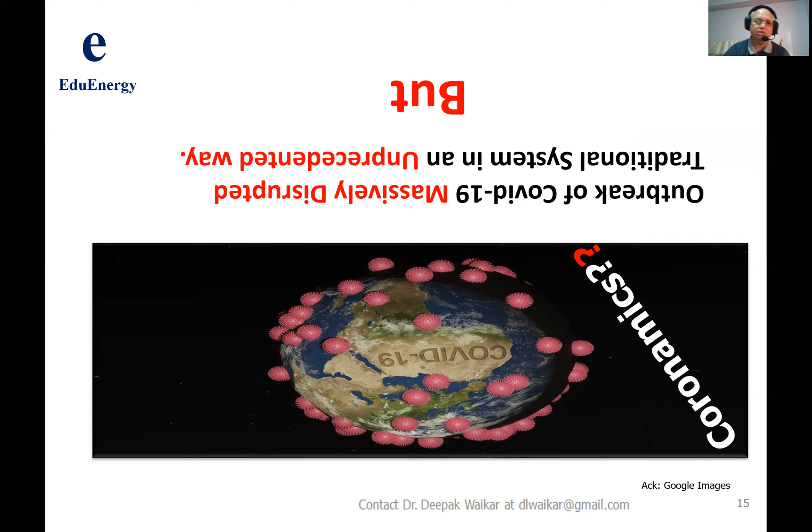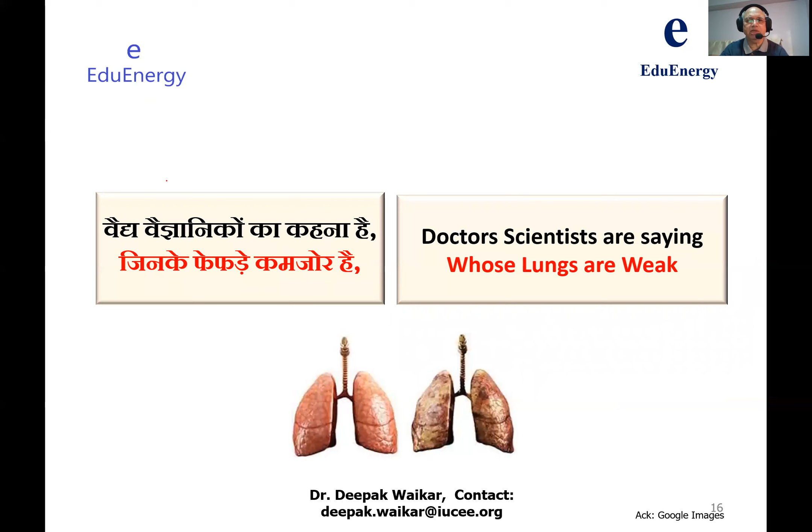So what can we do about it? Around two weeks back, and last week also, I shared with you that doctors and scientists are saying that people's lungs are weak. One reason could be medical, but another is environmental, our lifestyle - our lungs are getting affected because of this.

Hazardous air - you must be reading in newspapers and watching on TV about what is happening in New Delhi and around northern India, most of northern India. The air is unhealthy, very unhealthy, sometimes reaching hazardous zones. This was not the first time; it has been happening for decades. Verisk Maplecroft has done research showing 43 cities in India are affected, and therefore something has to be done.

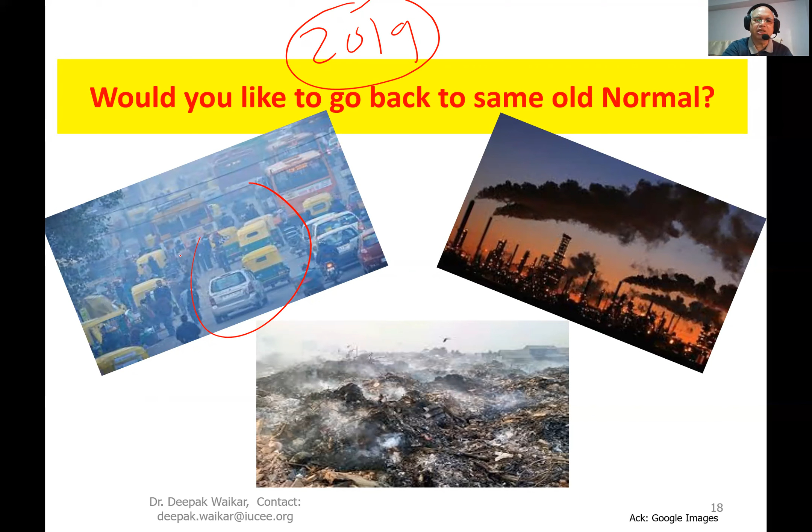A lot of research is needed because everybody says they want to go back to normal, before COVID, before 2019. They want to go back to 2019 or before - and you know what was happening then? Now also it is continuing - people are starting businesses again, going back to how things were in Northern America and Northern India. Power stations are humming, industries are humming, and garbage, kachra, is being burned again.

Obviously, whatever happens outside is not under our control, but inside our homes, offices, schools, campuses, classrooms, and laboratories, we can use natural devices or electrical devices that purify air, give cool air, and take care of the impact of global warming and hot temperatures. We also have to manage oxygen using oximeters. All these things we now have to do using technology so that our health remains within an acceptable range.

Why has this been happening? Because for decades, for the whole last century, our goal has been to have a modern, luxurious lifestyle. Still, geopolitical conflicts and wars are happening, population is rising beyond 7.5 billion, and for transportation we are still dependent on oil - our addiction to oil.

If that is the case, they say the world is revolving around three things: energy, energy, energy - urja, urja, urja. And that is where we are going to focus.

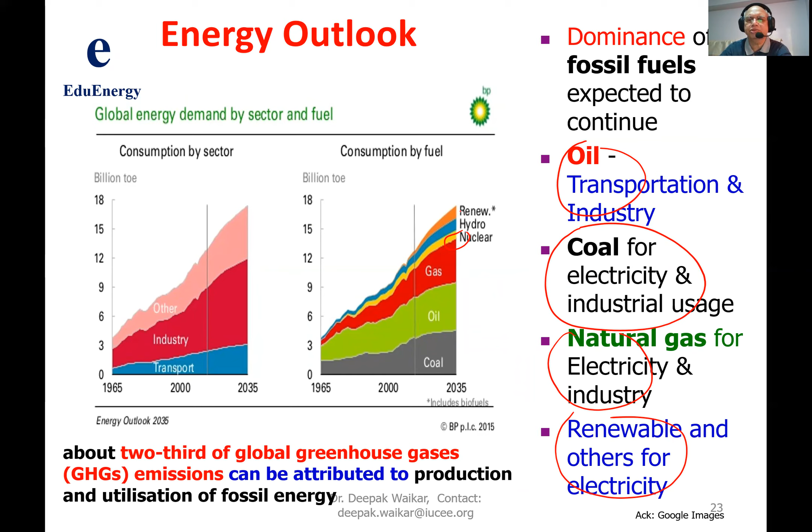So then, what can we do in the midst of dominance of fossil fuels, which is expected to continue because COP26 also did not make much difference?

Then what is your feeling about the term smart, clean, and green energy - Sundar Hari Urja? Is your heart beating for it? Smart is widely used in management literature - specific, measurable, achievable, result oriented, time bound. They call it SMART. So we need SMART goals and objectives if you want to achieve something.

One of the ways they are saying is now let us move to electric public transportation - train, metros, buses, electric buses. Almost most of the cities are now vying for metros. And another very popular theme this time is everybody talking about electric vehicles.

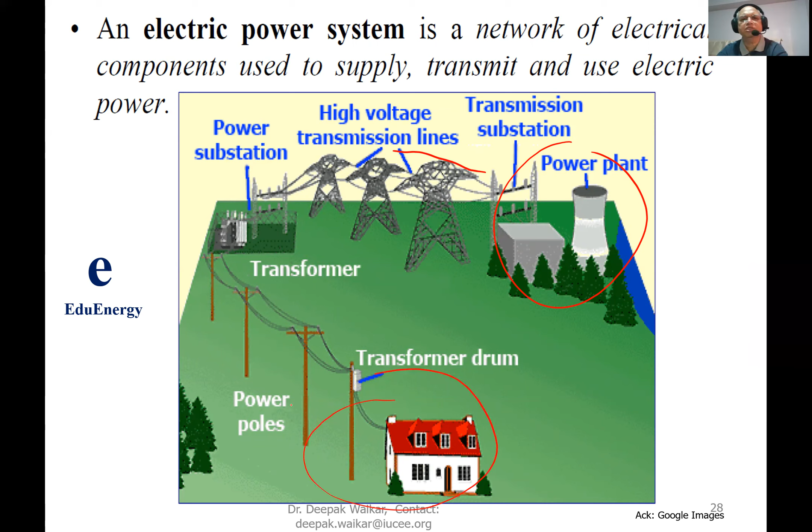Electric vehicles consist of a lot of parts, but are still expensive, so there is tremendous scope for research here. If we want to supply electricity to electric vehicles, we need to generate from power plants and transmit it over long transmission lines, high voltage transmission lines, come to power substation, transformers, transformer drums, to various places for charging. So we need a network.

At COP26, India's Environment and Climate Minister Bhupender Yadav proposed new wording for the final COP26 agreement, in which nations should escalate the phasing down of unabated coal power instead of the previous wording wanting to phase it out. The minister said no way, we will maybe phase it down, not phase out. It means coal-fired power stations will continue for a certain period, at least probably more than 2 decades.

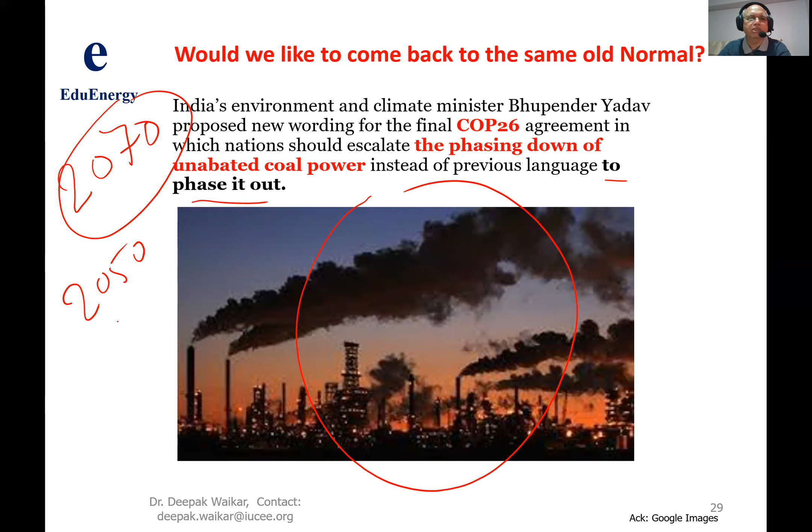Necessity is the mother of invention. If coal-fired power stations are continuing for the next 2 or 3 decades - because at COP26, India says 2070 we will have net zero emission, America says 2050 net zero emission, China says 2060 net zero emission - it is more than 20, 30, 40, 50 years from now. So till that time, what do we do? We have to do something.

One of the ways to address this issue is to use two technologies: one is called clean coal technology, CCT, the other is carbon capture and storage, CCS technology. Instead of coal burning in a power station, first transform coal into gas through a gasifier into syngas. They found that when you use gas, pollution is reduced by almost 70%, but 30% of emissions - CO2 emission, pollution - still come out.

Then use the syngas in thermal power stations to produce electricity - one is a gas turbine, the other is a conventional power station. Still emissions are coming out from here; exhaust gas and emissions are still there. This is according to the World Coal Institute.

The World Coal Institute also says if you can capture this gas from the power station, and even from oil rigs, capture it and bury it deep into the ground or ocean, then this CO2 can be used to extract methane from coal, which can then be used for various purposes. They also say this carbon can be used to release more oil. So we are going to reuse this carbon dioxide, but at the same time burying it, so they hope emissions will be reduced to a greater extent.

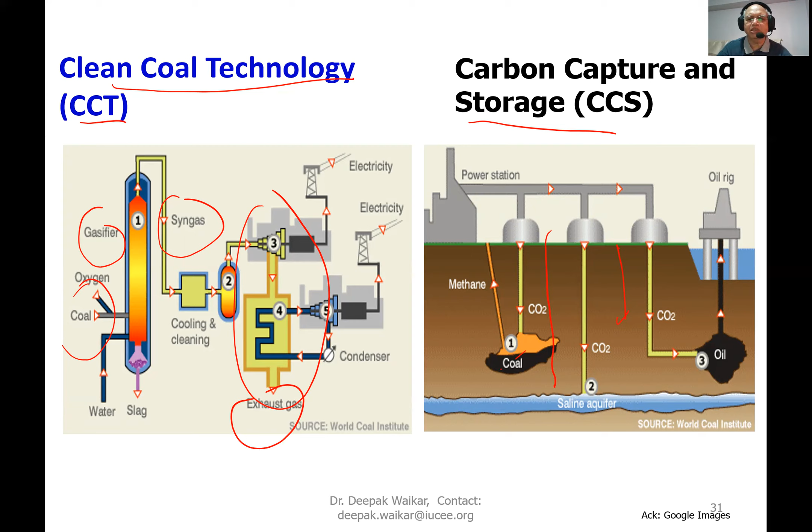This technology at present is very expensive, so there is tremendous scope for taking up research projects in this area - for the next 25, 30 years definitely, because phasing out is targeted for 2070 in India. Till that time, existing power stations will be working for 30 years, and new ones will work for 30 to 40 years; existing ones will continue. So the choice is: conventional power plant versus clean coal technology versus CCS.

A, B. Put in the chat box which one you would recommend - the conventional one or CCT plus CCS.

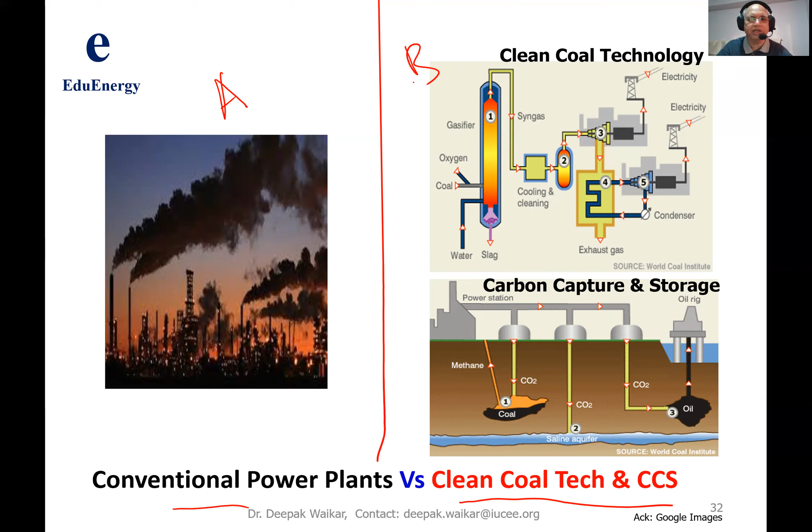As I mentioned, there is tremendous scope here for research, student projects, writing articles about what is happening in and around your region. Presently, coal is concentrated in a few states, but thermal power stations are located almost all over India, so you have to transport coal. This transportation releases carbon dioxide and pollution, and you have to use energy to transport it. Compared to that, transportation of electricity is different. So you can do a study, a case study comparing transportation of coal versus transportation of electricity. Use data from your state and publish a case study in our symposium.

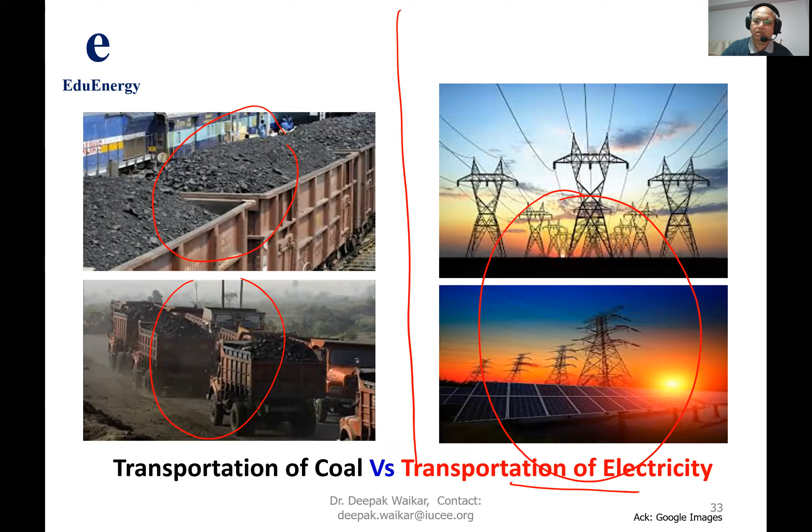Is there a scope for hope, or am I talking a pipe dream? Put in the chat box whatever you feel.

Now let me take you.

All of you got registered to IUCEE FTP, so you got an e-pass. Board your flight, follow all protocols. Your friendly pilot is taking you, and in your mind we are going to go to the smart, clean, and green energy world virtually. In a fraction of a second, you have landed at one of the smart, eco-friendly airports, inside which there is green transportation. For those who need help with hand luggage, there is a robot there to transfer it using technology. They are using the latest technology to scan your passport and your biometrics for giving you verification of your visa. You arrive at your terminal, your luggage is automatically brought here, and we are waiting for you. Welcome to Smart, Clean, Green Island.

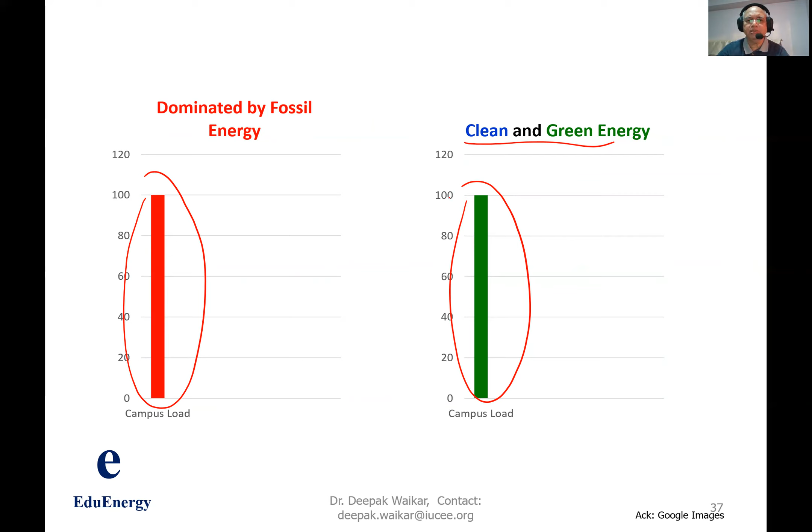Unless something changes, if you immediately want to replace 100 units with 100 clean and green units, you have to invest more. That is why most people ask: do I have a payback period? How much to invest? Will I get the money back? How long will it take? And therefore, many of them postpone their decisions. The same thing happens when you do a feasibility study and find everything is good, but economically it is not affordable. So then what should we do?

According to the World Energy Council, where I had the privilege to work with them for almost 5 years as a volunteer vice chair, they say: achieve energy efficiency across the entire energy supply chain - generation, transmission, distribution, and utilization. There is a scope to write a research paper on this as well.

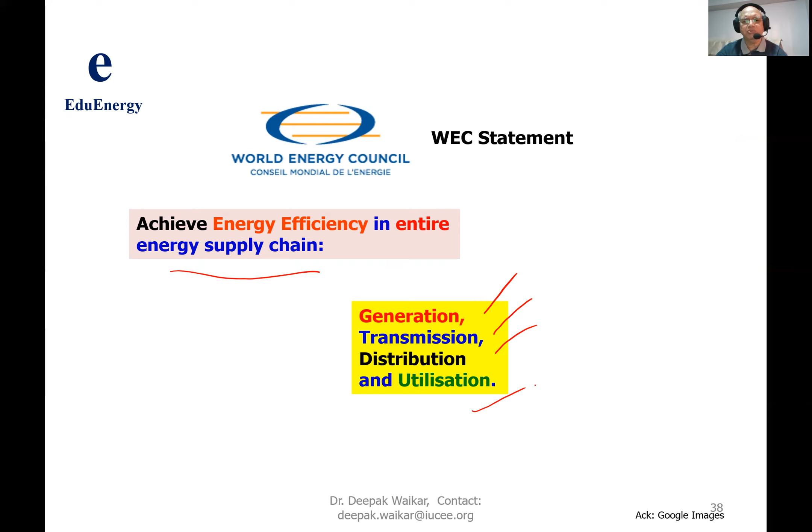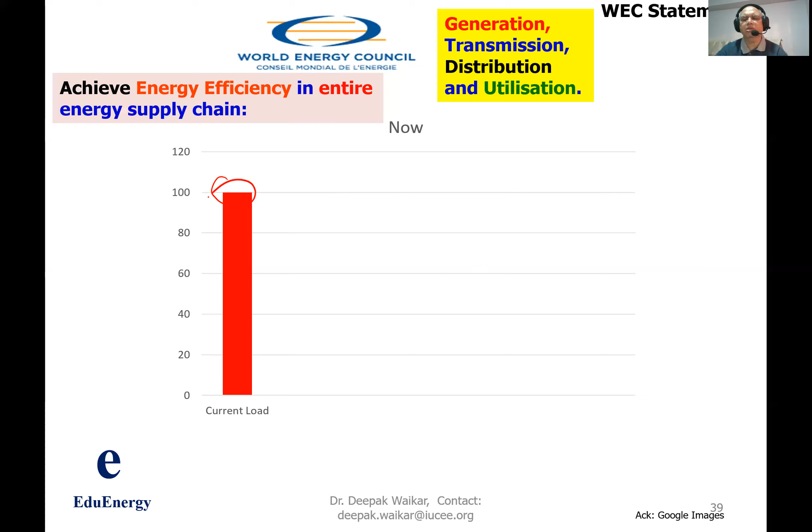In your case, since you're not producing energy, mostly it is about utilization of energy in your campus. So suppose we have 100 units. Before you think about just renewable and clean energy, first apply an Energy Management System, EMS, which helps organizations better manage their energy use and improve productivity. This falls under ISO 50001, which gives organizations a recognized framework for developing an effective energy management system. I will be very happy to work with you if you want to develop this.

So the first part is energy conservation - I think Dr. Ajay will discuss more about it. Energy conservation is predominantly behavioral change: switching off lights, fans, and other devices when not in use. By behavioral change in your campus, you can reduce energy use by up to 15%. So your 100 units can become 85 units.

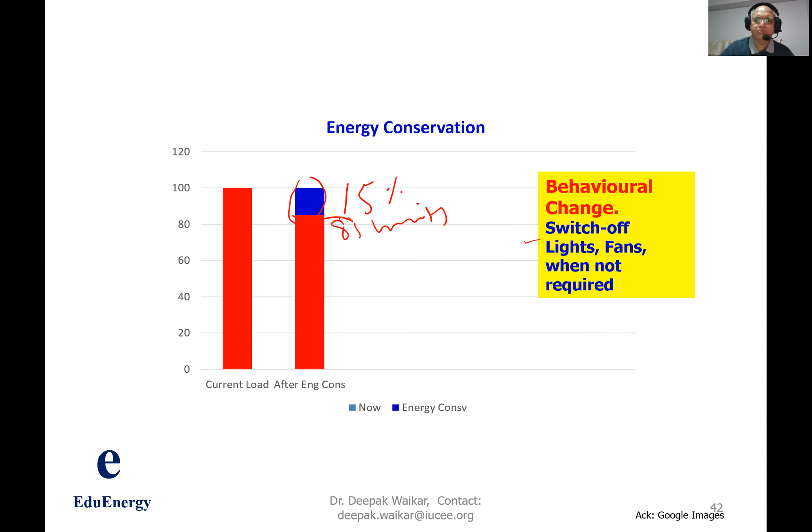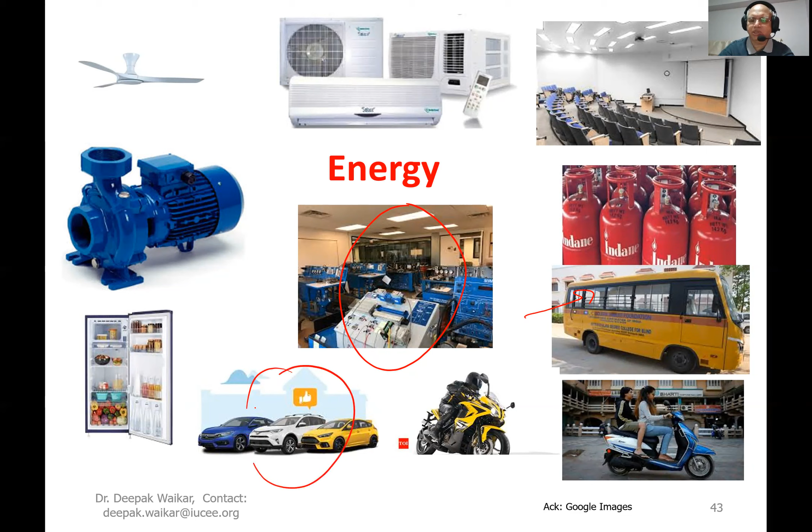And for the last almost 1.5 years, 18 months, we have been using online. Now also we are using online. So online also consumes electricity. Now it may be small per head, but if billions of people are using it, it is a huge quantity.

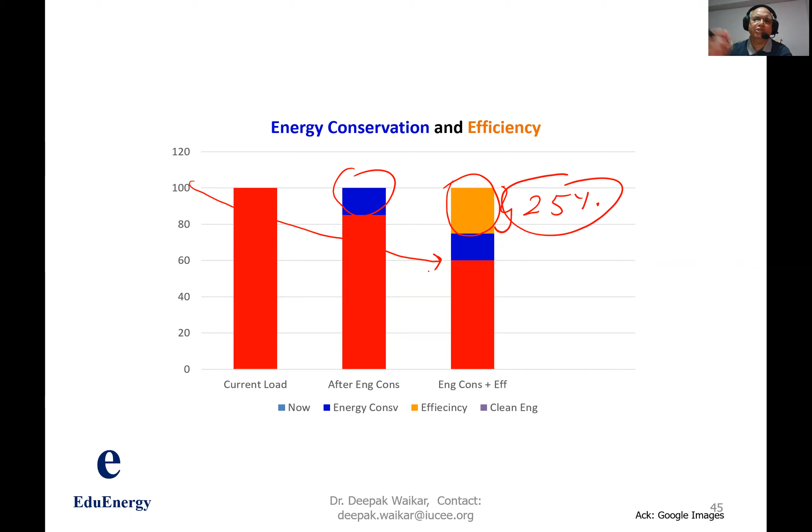What they say is, okay, you make effort for energy conservation. After that, go for energy efficiency. Energy efficiency requires engineering solution. Engineering solution means you will look at it and appropriately modify it. And they say there is scope for another 25% saving just by using energy efficiency. In some cases up to 50% also. It depends on the factor. So total what happens is, just apply energy conservation and efficiency, your load has reduced from 100 to 60. So you are saving here, you are saving 40% on your electricity bill.

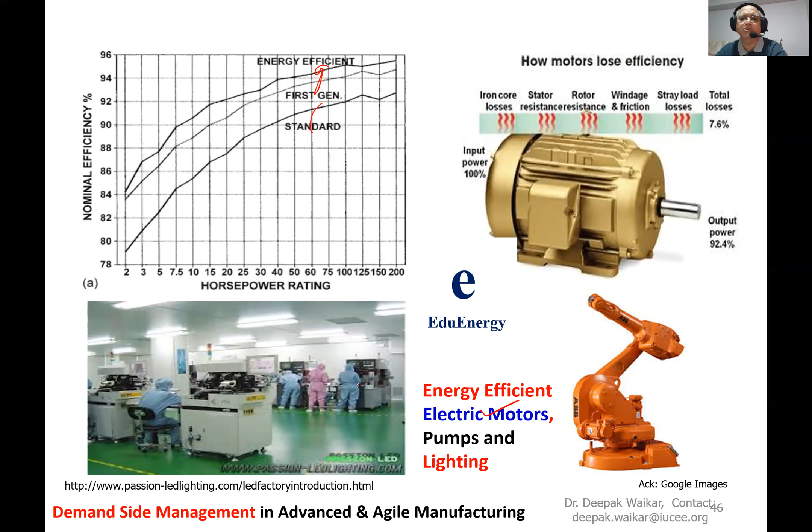And there is one device which is popularly used, it's called electric motor, induction motor, which consumes a huge quantity of electricity all over the world. And if you can change from standard to energy efficient motors, there is scope to improve efficiency and reduce losses. So energy efficient electric motors are used even in robots, pumps and lighting, you name it, in your manufacturing, advanced manufacturing, there will be tremendous use of this. So therefore, there is scope to use this.

Now, according to Morten Wierod, president of ABB Motion, in April 2021, energy efficiency is the world's invisible climate solution, because he found that as per their study, electric motors consume 45% of electricity globally. So doing research in energy efficiency of electric motors is still a good topic for research, student projects, and others.

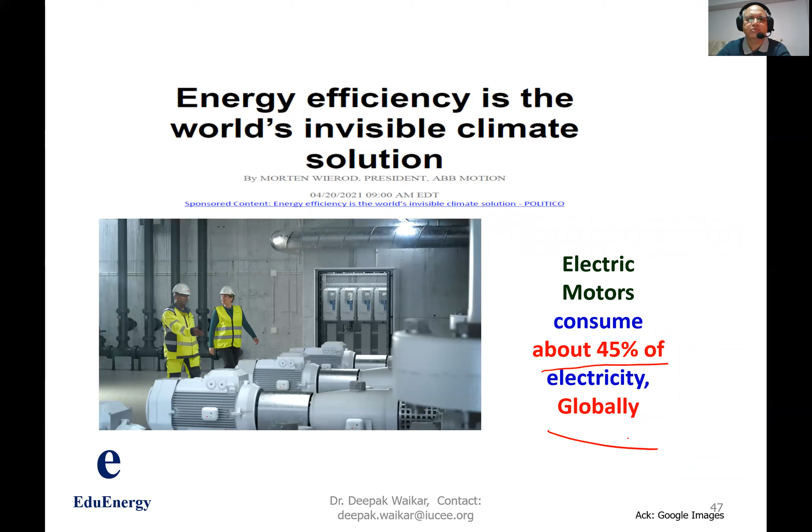Now that is about energy efficiency and conservation. Now, what is your feeling about renewable energy? So we are all going here, we are going to reduce greenhouse gas emissions once you use all this. And we are happy to know that even it has been promoted by stalwarts like former president of India, Dr. APJ Kalam, who mentioned about the energy independence by 2030 goal. That is going to be very challenging because India imports 90% of oil, even coal is also imported, oil, gas, other things from somewhere. So if we can increase power generation by renewable, even 25% is going to be a tremendous achievement.

And Ministry of New and Renewable Energy is giving all necessary framework for that. Yes, all of us know, and I think next week Engineer Deepak Gadia ji is going to discuss with you about solar energy. PV, photovoltaic, is widely discussed now. They think it can provide some solution, but there is a but.

First thing, it depends on imported solar cells. Now what it means is when you install solar photovoltaic energy, you are shipping your jobs. So therefore, you have to think about whether you can manufacture solar cells. Second, its reliability is low. Efficiency is low, hardly at 20% or less. And because it is not that reliable, battery storage or equivalent is needed, which increases cost. So don't go by what they say, that solar energy cost has gone down. No way, because if they're only paying for whatever and somebody else provides the storage, then it's different.

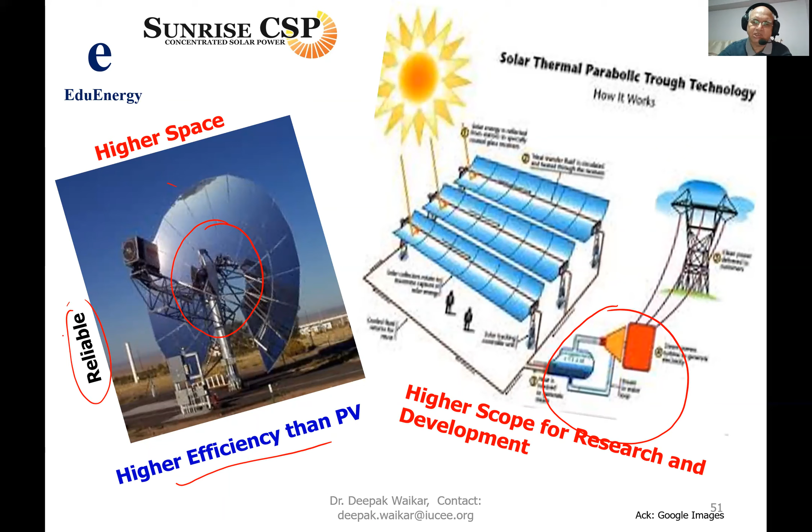Yes, efficiency is better than solar PV, and according to engineer Deepak Gadiaji, it can also give you more jobs. But obviously, whether it is solar PV or solar thermal, it takes large amount of space. One of the ways to reduce this space and increase efficiency would make it comparatively more viable. They say reliable compared to solar, but obviously you still need storage for reliable electricity. So those in mechanical engineering, there is tremendous scope for research here: electrical, electronics, mechanical, and others.

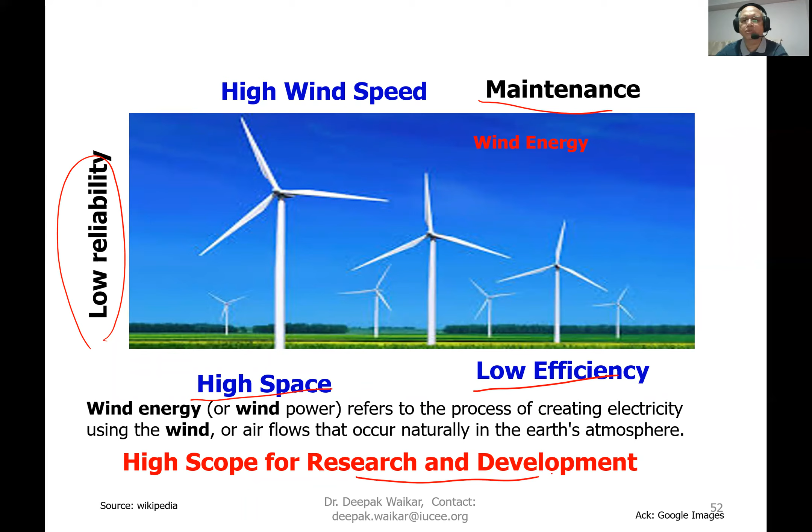You must have heard about wind energy. Yes, it's comparatively cost effective, but again low reliability because it depends on the flow of wind. Wind direction and wind speed are not under our control. Maintenance is not easy, and efficiency is still low. They say it's better than solar, but still low. It requires high space, and you need towers, so that way it is not that reliable. Therefore, there is higher scope for research and development, so you can work on it, and one of them I will share with you.

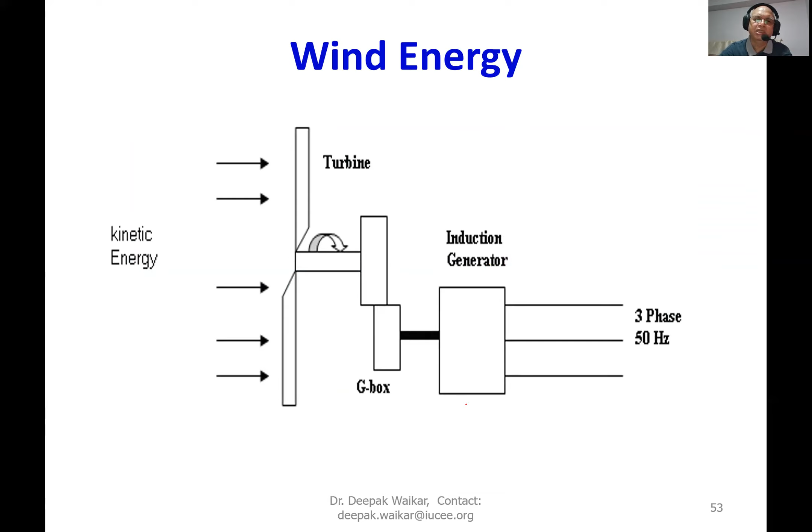So obviously, kinetic energy, you've got a wind turbine, you need a gearbox, an induction generator. It is a variable one, so you need an induction generator to make it 50 hertz. And obviously, you need an equation. This equation will give you the output, which depends on wind speed predominantly and area. That is why you need a huge area.

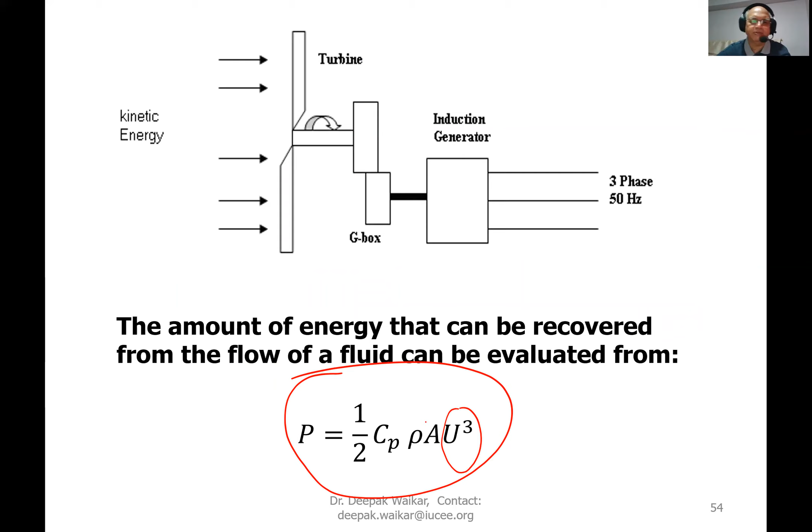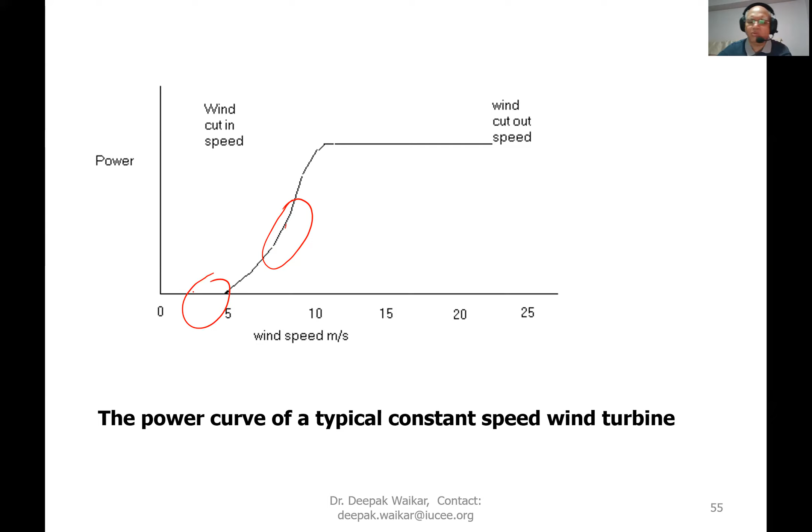So what they say is you need a certain wind speed to get electricity. Anything lower than 5 meters per second, there is no output. Therefore, there is scope for how we can design so that you get a micro one, otherwise you need higher wind speed. So there's scope for micro wind turbines which can run on lower wind speed. Different designs have been proposed, and you can work on that.

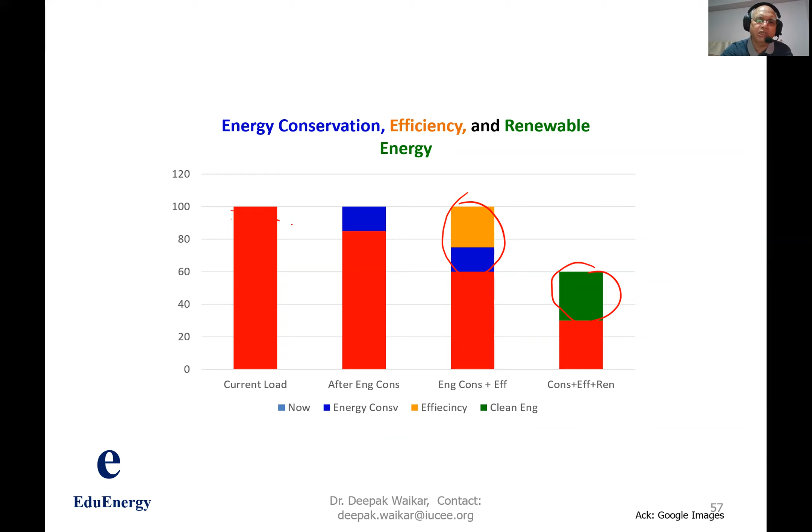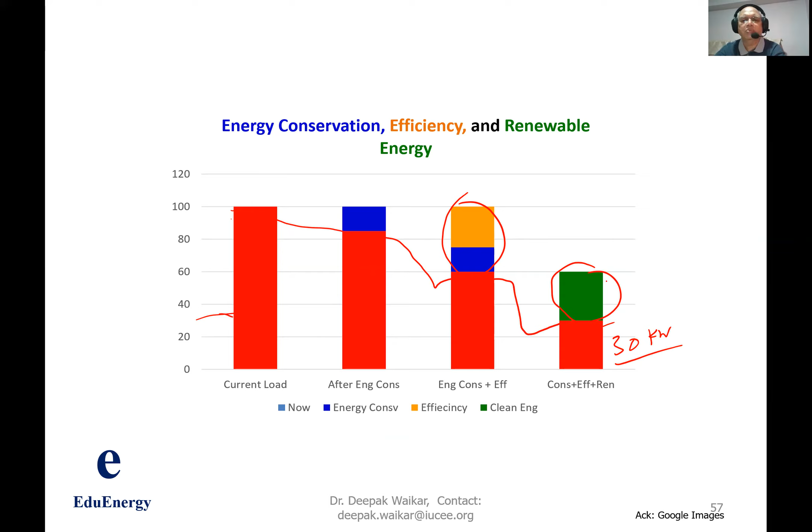They can be installed on highways, and when vehicles pass, they generate some wind flow that can be used to generate electricity, which can maybe just power lighting, whatever it is, but it will be something better than nothing. So this way, if you use some of the conventional available options—solar, wind, these things I mentioned are becoming so common now—they're becoming renewable but conventional. Then you can replace whatever you saved here, you can invest, and now your load is reduced from 60, 40 to just maybe 30 kilowatt or 30 megawatt, whatever it is. So now you can say 70% saving. Now whatever you saved here, you invest again, you save, you invest. That way it will be more affordable. Systematic way is the engineering process.

Another thing all of you know, because of climate change, nowadays when it rains, the capital becomes a lake. Now there is water energy, so obviously the engineering problem must be solved. That is where your sanitation and drainage system come in. Those colleges which are in cities can take up such projects and show some demonstration. Obviously, we know hydro—yes, bigger dams have been there—but now the scope is there for micro level.

They are talking about tidal energy using a small generator, with different designs for tidal. Those colleges in coastal areas can use whatever energy is trapped in the seawater to generate electricity. Obviously, this is still in early research phase. You can definitely use it for student projects, faculty projects, and even apply for research funding.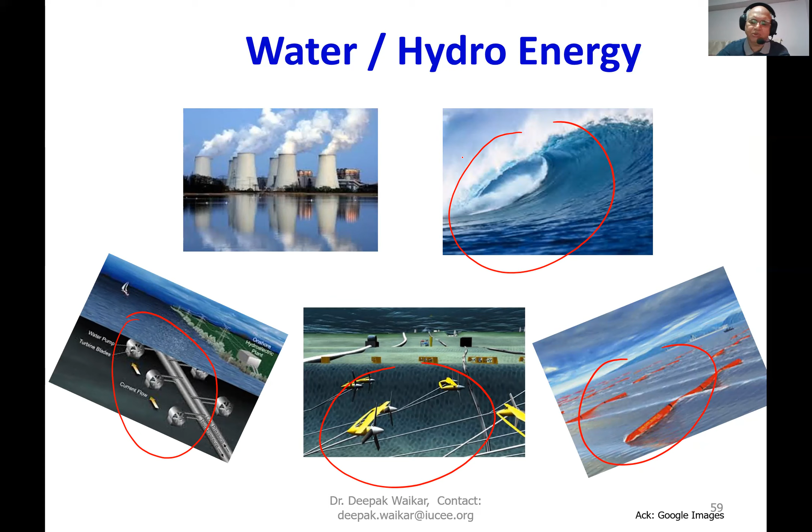One of the easier ones they're talking about is Pico Hydro, just 200 watts, 200 to 500 watts, which can be used even for nearby waterfalls. They can use this for those purposes.

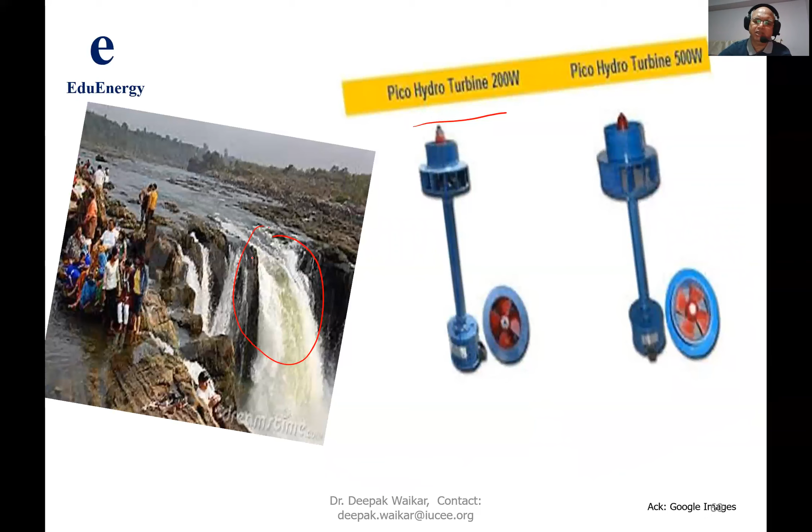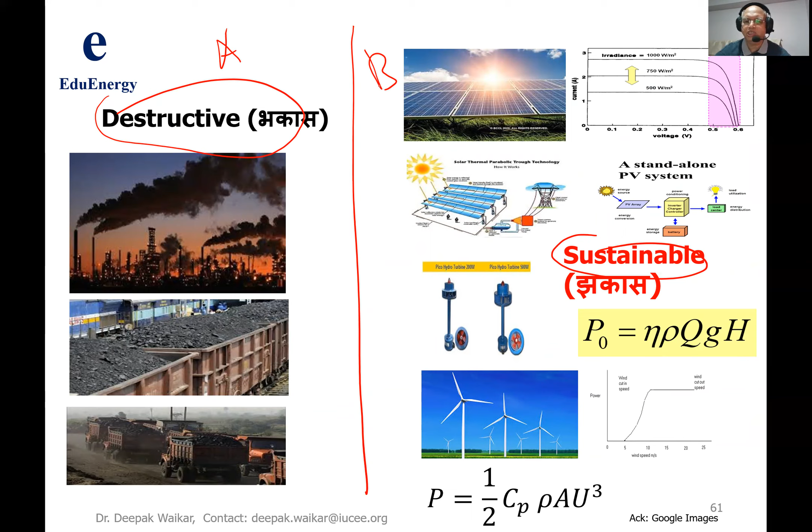Sustainable, sustainable. So more and more types of clean and green energies are coming on board. As a result, you can go further down from 30 to maybe just 15, 20 percent now, with the major part coming from renewables. So this is how you systematically plan. You have a 5-year plan—I'm giving you a 5-year plan. For your campus, you can do it in 1, 2, 3, or 4 years, depending on your level where you are. You decide.

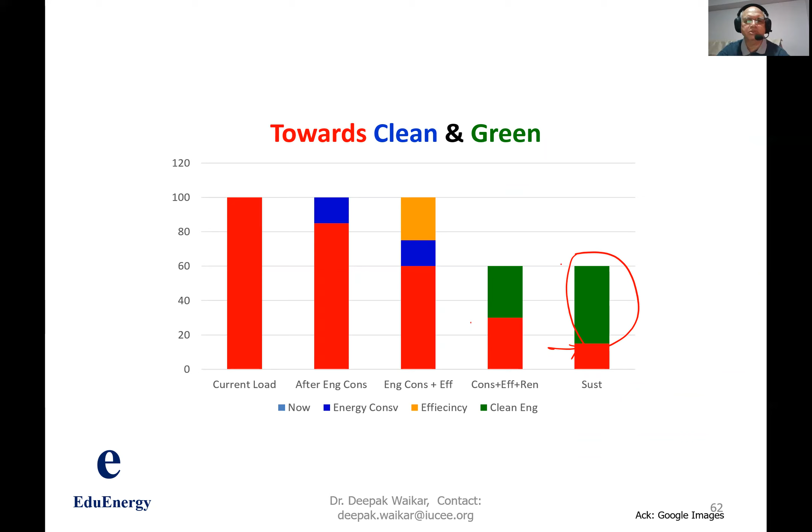Now, very quickly, what is it that is abundant in the world? You can put in chat box. Obviously we know one is human energy - we see 7.5 billion people in the world, 1.3 billion in India. Waste energy, we waste a lot, and there is nothing short of spiritual energy, which is needed because of which all of us are existing.

So let us talk about human energy, how we utilize it. We are very happy to mention all of you are developing human capital. You are training students, you are educating them. So it is human energy, and you are transforming that to some better use.

Obviously there are some challenges because many graduates are coming but they're not getting jobs. As a result, Edu Energy Singapore is helping many engineering colleges through IUCEE Foundation, World Energy Council, International Energy Foundation, IEEE, CTF, for conducting sustainable development programs for students. One batch already done, next batch coming in January - Smart Clean Green Future. Exactly the webinar I'm giving you, I do faculty development programs systematically, transforming education so you can include integrated multidisciplinary holistic education.

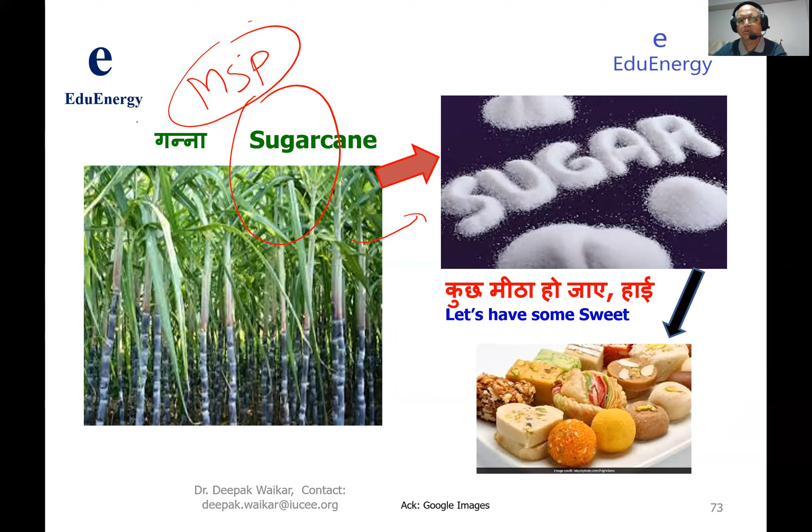But what happens is when farmers produce sugar cane, it is converted to sugar. There are sugar mills, but the cost of sugar is going down. As a result, farmers are saying we are not getting MSP, and they are agitating. And we still say let's have some sweets - kuch meetha ho jaye kehte kehte bahut kuch ho jaata hai. We got lots and lots of sweets now.

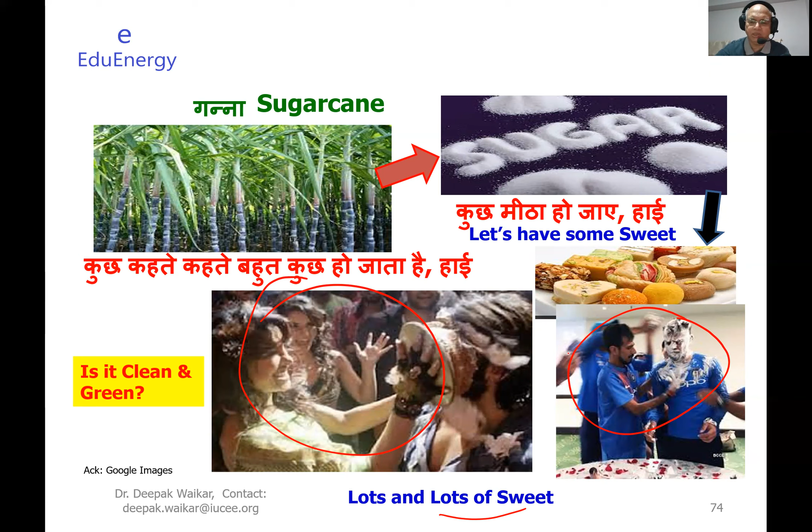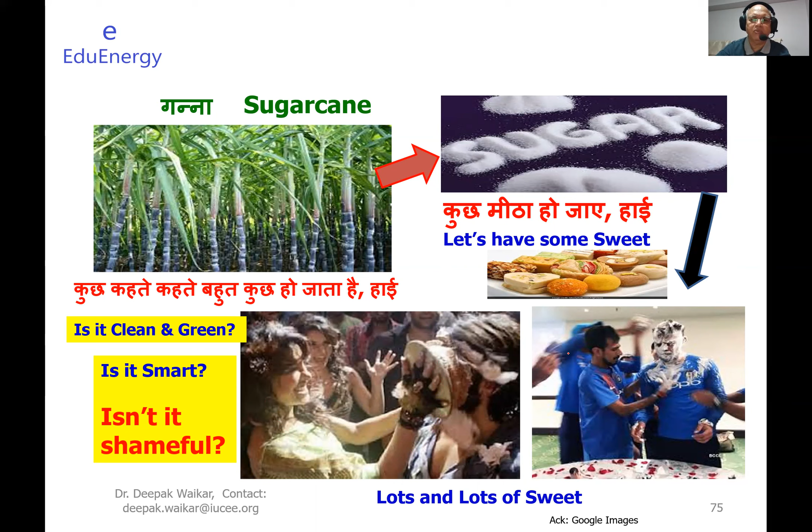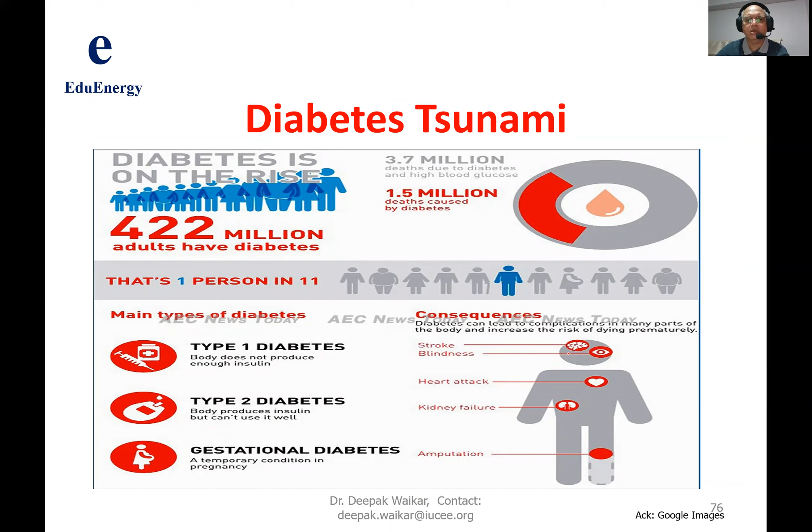Look at Bollywood copying Hollywood - is it clean and green? Look at our IPL players, cricket players who are supposed to be role idols for students - what are they doing, is it clean and green? This is where we have to train our students' mindset. This is shameful, we should not encourage this. We should tell our students this is not appropriate, especially when in many developing countries people do not have food to eat even one time. In addition, because these people's lifestyle has changed, they are calling it a diabetic tsunami. This is a bad effect because of our lifestyle - almost half a billion adults have diabetics worldwide.

What we should do now? What can we do to improve the situation? Put on your thinking hat - what can we do?

One of the ways: sugar cane to sugar, or sugar cane to sugar, or sugar cane to biogas, ethanol or biodiesel.

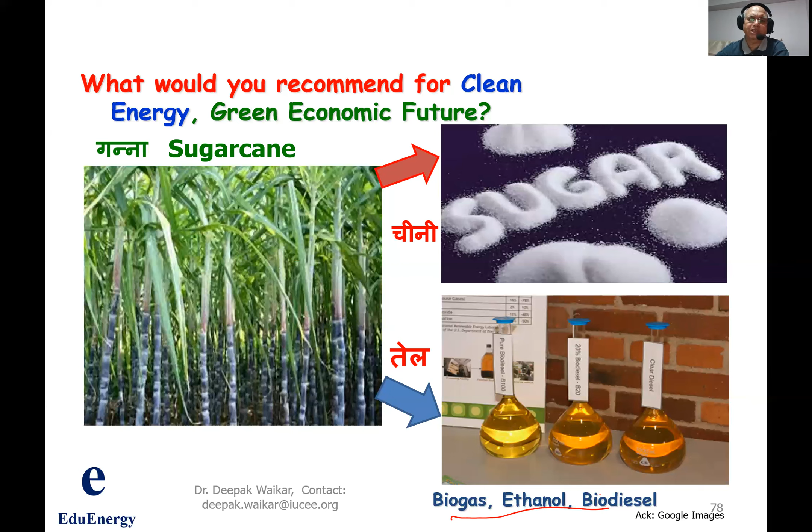Choice is there of how we do it. Obviously this is an engineering process. If you take sugar, make sugar, destructive process. On the other hand, you convert into biogas, ethanol - there is a systematic engineering process. Engineers can do that. There is blending required, purification, fermentation, all at the fuel station.

And then this fuel station along with the battery, you have got hybrid vehicle. As we have seen, they are not going to phase out bio-diesel and petrol. So if they're not going to phase it out, they need time to do that. Meanwhile, transition hybrid vehicles can be a reasonable good choice, a step towards synergizing energy and transportation.

So I'm giving you one more topic. All of you can do research on this - it can be part of the symposium: step towards synergizing energy and transportation.

So we have seen two things: whose lungs are weak, what we should do; whose blood sugar level is high, what can be done, how we can divert that energy. And now, very important, on whose heart doesn't want to work - this part doesn't want to work.

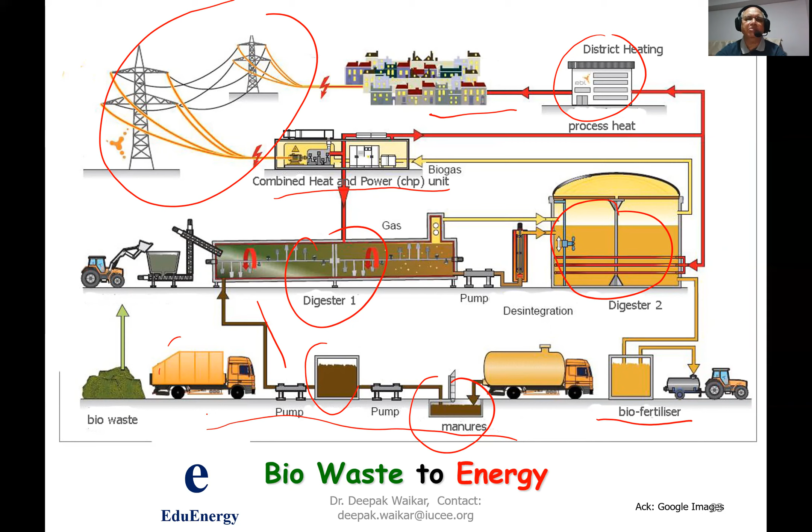So bio-waste to energy could be one possible alternative. Bio-waste is renewable because it is happening almost every day - all of us are producing it. So the choice is ours: do we want to burn waste and leave it into the air, or burn it, digest it, and use it for electricity - a smart, clean and green future. Bio-waste to energy, choice is yours. Definitely there is scope for several student projects - this is a multidisciplinary project.

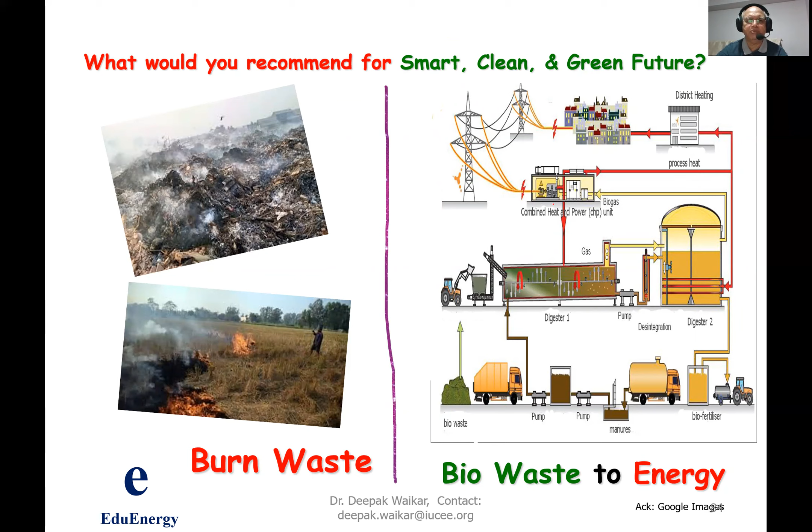And if you combine with other ways - instead of burning it, you are dumping a lot of waste, which includes most countries. Now, one part you can convert into gas and electricity; other part, the waste can be converted into biodiesel. So choice is yours: A, destructive way; B, sustainable way.

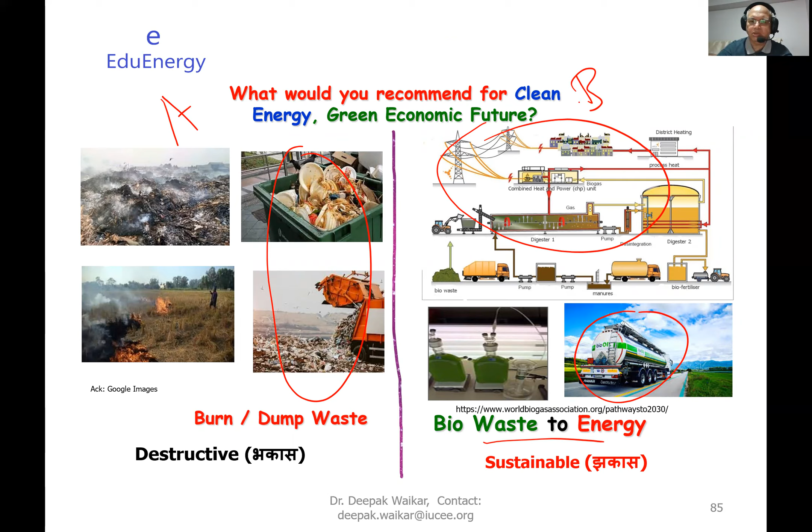So if you add this, you get more and more from renewables because you've reduced first - you reduce by energy efficiency only. You are taking very small amount, maybe, from the electricity grid. That is what the next phase will be. So it depends on wherever you are - if you are here, go for here; if you are here, go for here; if you are here, then don't stop there.

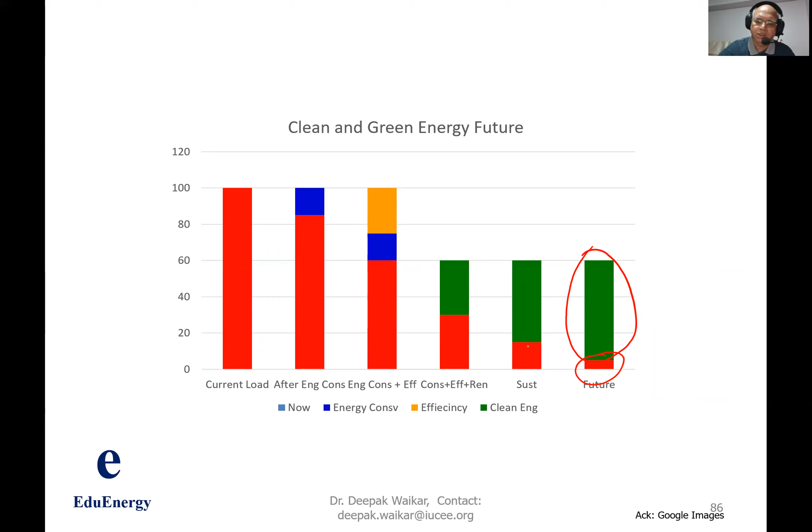There is still scope because IEEE has come up with the hybrid AC-DC microgrid. This is a multidisciplinary project. You have got AC bus, DC bus, AC devices and DC devices - your AC devices at home and DC devices at home. So what you can do is get supply from the main grid, but only when you require it. Otherwise, predominantly we can use renewables - from wind, from electric vehicles when they are not being used at night, they can be used too.

You charge it, daytime you use it. Same thing, solar batteries are charged and they're ready to feed. Then there is a coupler here.

We have got DC devices which can be fed by DC grid, DC microgrid, whether it's your television, your notebook, your handphone, and others, they work on DC. So they say, why not have those devices in household which has got DC use DC, and those who are AC use AC. That is what the IEEE standard says.

Therefore, each institute, each college, if you have it, microgrid, congratulations. If you don't have it, time to get it. Because it is multidisciplinary, it requires power electronics, electrical, mechanical, compressor, it is a flywheel. I can show you it is a multidisciplinary project if you decide to have hybrid AC DC microgrid as per the IEEE standards, which is available now.

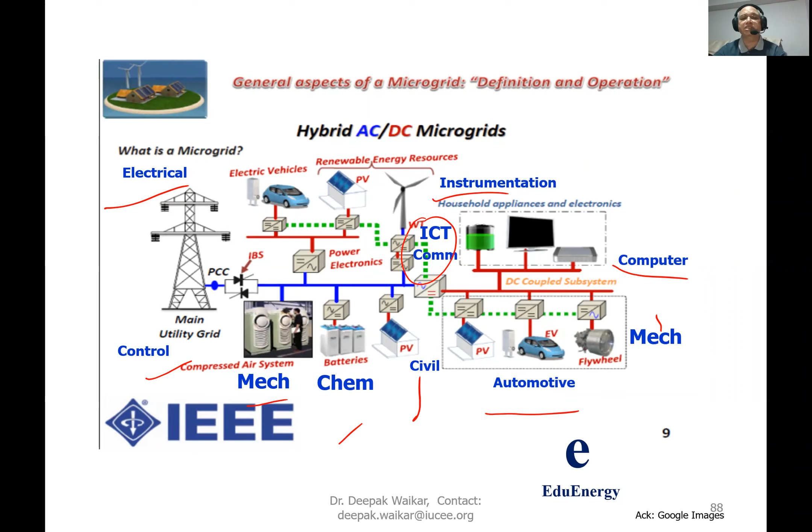All the projects I mentioned create a learning space, and at the same time you're solving the problem. Not only that, once you are interconnected, you can have multiple microgrids, and obviously they will require IIoT, latest technology, a lot of data coming in, data analytics, communication, 5G is coming. You can experiment it, put some devices there and try it out. Yes, your cloud also is there.

And as I mentioned, even AI, ANN. You must have seen CNN, now ANN, artificial neural network, machine learning, deep learning, cyber security. All these can be incorporated.

So your students from all branches can have small projects, individual projects. Mechanical guys will be given these projects, civil guys will be doing this project, chemical too. You, as in charge, having holistic knowledge about it, coordinate. This could be a multidisciplinary project for you, which is in line with national education policy, in line with AICTE, and this is what industry also wants. Students learn a lot from it. You can create projects, you can create internships here also.

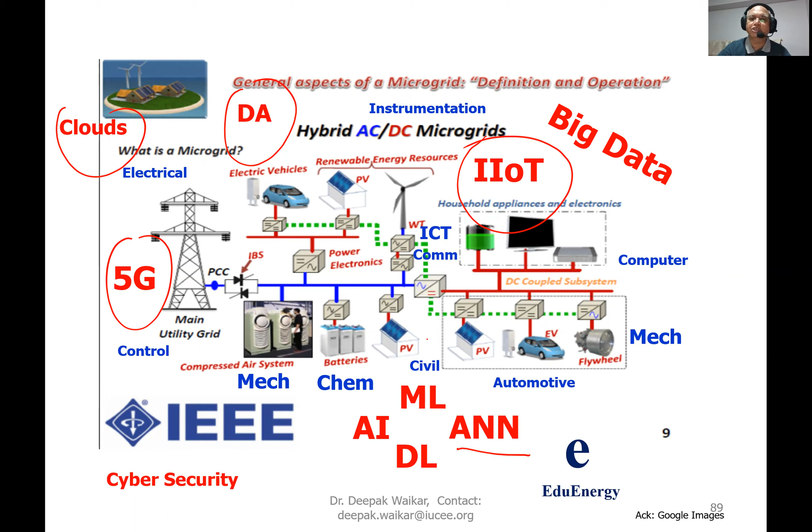So is there a scope for hope, or am I talking pipe dream? Let's see. Obviously, future possibilities are still there.

Some of them are working on zero emission hydrogen vehicles. They use hydrogen instead of other catalytic electrolytes, it goes to the catalyst, you have got anode and cathode, and it will generate electricity through this one. And what they found is that the byproduct is water.

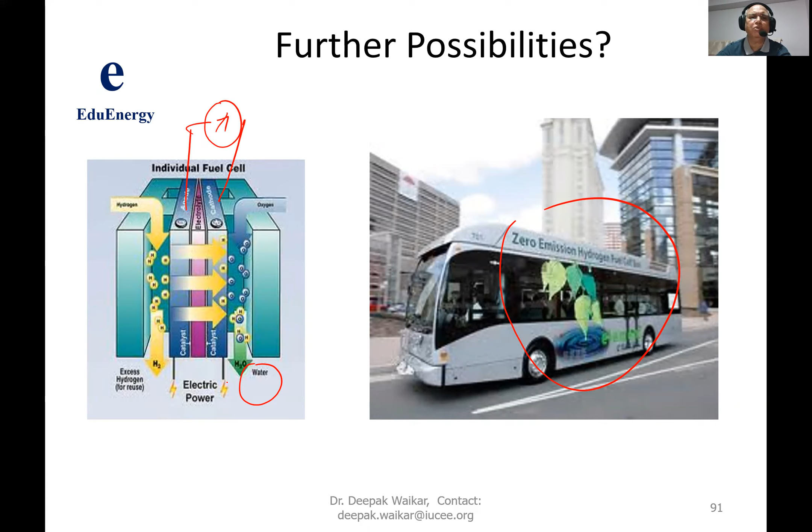So compared to other emissions, this is zero emission, and the water can be reused wherever there is a shortage of water. This can be used in buses, they call it a zero emission vehicle, hydrogen power. Obviously, this is going on now, but it is expensive, therefore there is a scope for R&D, tremendous scope for student projects, for faculty projects. You can get a funded project, work on it, and get it done, in collaboration with industries also.

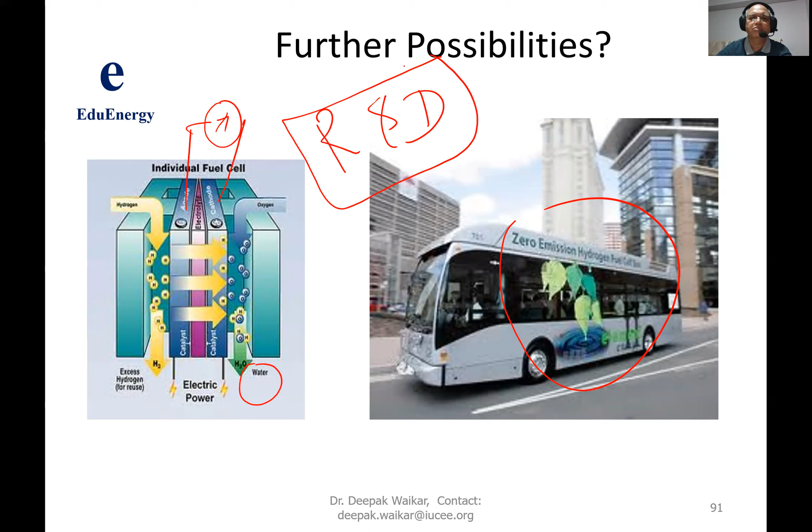And as I shared earlier, India's energy strategy now for 2020 is towards a gas-based economy, clean use of fossil fuels. I've already mentioned this in many webinars, conferences, and research papers. Now, by 2030, we are going for cleaner, greater reliance on domestic biofuels, and 450 gigawatts of renewable energy by 2030, whether wind, solar, hydro, or micro hydro, you just name it.

Electricity to decarbonize mobility, electric vehicles, moving into emerging fuels like hydrogen. So all of this, whatever I mentioned, you just take it as a project and apply digital innovation across the energy system, with big data analytics, cybersecurity, AI. If you follow the 7 pillars, and when you create your projects and mention in your project reports and funding reports that this project is in line with these initiatives of India, your chances of getting funding are high.

Well, let us look at what global players are saying. One of the studies, the Shell study, says we should now focus more on energy efficiency and renewable energy. That is what I mentioned today for mitigating the effects of greenhouse gases. Ideally, they feel renewable energy has the potential to become the primary source of energy.

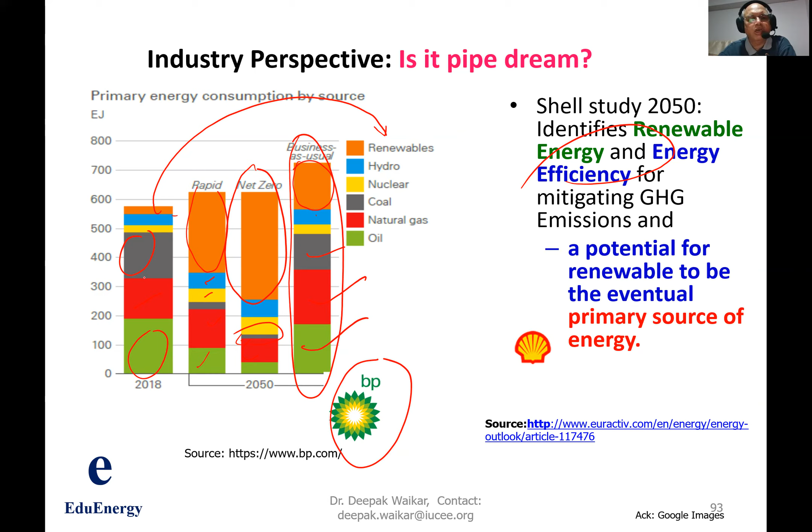We want to do it smartly in a sustainable, market-driven, accountable, resourceful, transformative way, in which we have discussed how campus load can be reduced from 100% dominated by imported fossil energy to 100% clean energy systematically, not directly - energy efficiency, all those things I mentioned. And if you have scope after you do your studies, then you can start exporting and earn some revenue.

So green economy - you can create jobs, earn some revenue.

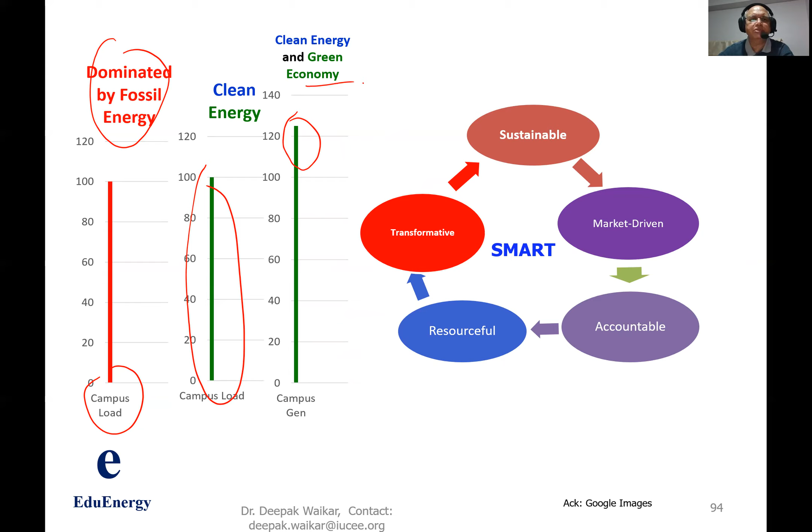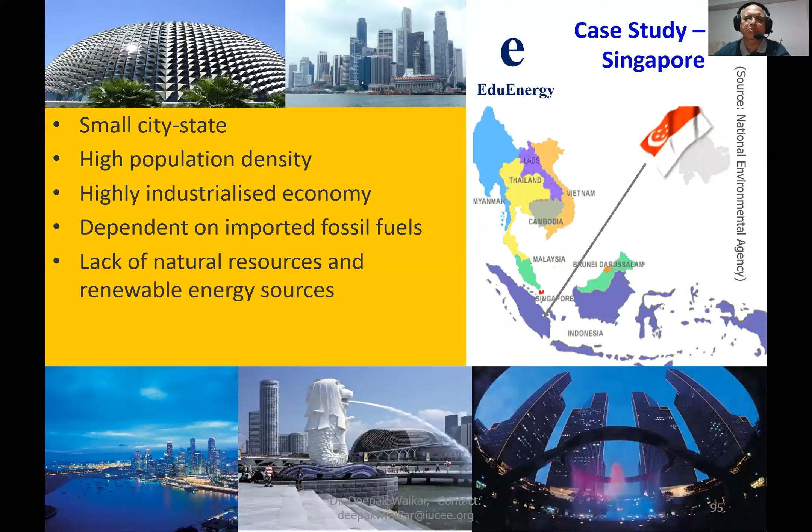Let me share with you the Singapore case study, which doesn't have any natural resources - a small city state with high population density, dependent on imported fossil fuels, lacking natural resources. The only resource they have is human resources.

Singapore has decided, by 2030, to make 4 switches. One, obviously natural gas will be dominant, but natural gas prices have gone up, so electricity prices are going up, so they are thinking of doing something about it. Solar deployment by 2030 - they want almost 2 gigawatt peak installed, mostly on rooftops. Also connecting with regional power grids, which have been there but is still a challenge.

Low carbon alternatives - I mentioned carbon capture, and use of hydrogen. That's green hydrogen they are talking about, though obviously there are other types of hydrogen too. Energy efficiency is one of the dominant strategies in Singapore. And they're involving government, researchers, and industry together to achieve it.

No more new diesel car taxis in Singapore from 2025 - that's the decision they made in March. Let us hope what they can do about it, how they can convert these into electric vehicles. For charging electric vehicles, whether you use fossil fuel or solar - this is another project you can study: fossil fuel versus solar, how much electricity is consumed, and how much greenhouse gases you can reduce.